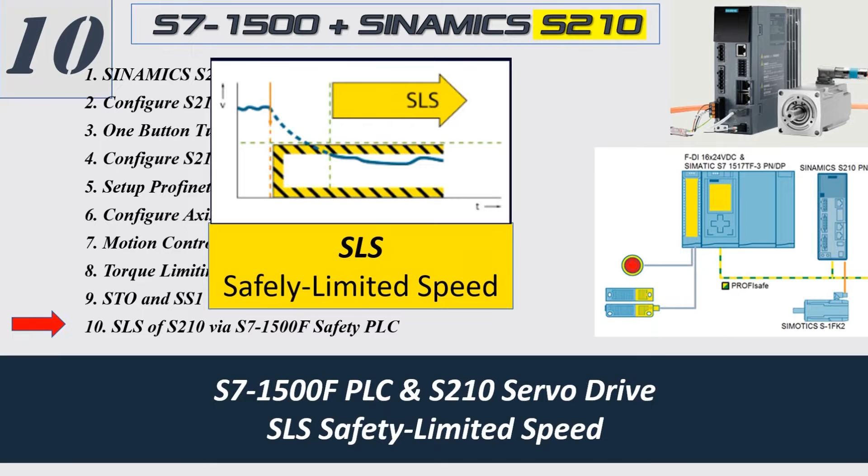In the previous video, I implemented the STO, safe torque off, and the safe stop 1, SS1, safety functions. In this video, I will demonstrate another common function. This is a little bit more advanced function named SLS, safely limited speed. Using SLS, once the drive speed is out of the valid window, the drive will go to SS1 or STO mode.

Safely limited speed is one of the commonly used safety functions in converting applications. For example, when the gates are all closed, the safety is all okay and the system can run normally. In other applications, when the door is opened, the safety needs to totally kill the drive, maybe with STO or SS1. However, in converting applications, when the gate is opened, we still want the drive to be able to run slowly, for example to do a jog move. This is used for threading the web, manually setting up the web in the machine.

So when the door is opened, we still allow the drive to be powered up and run at a slow speed. The safety function needs to keep monitoring this speed. As long as the speed is within this safe range, the safety shows okay. Once the drive speed goes above this range, the safety should immediately kill the drive. This is a very widely used feature.

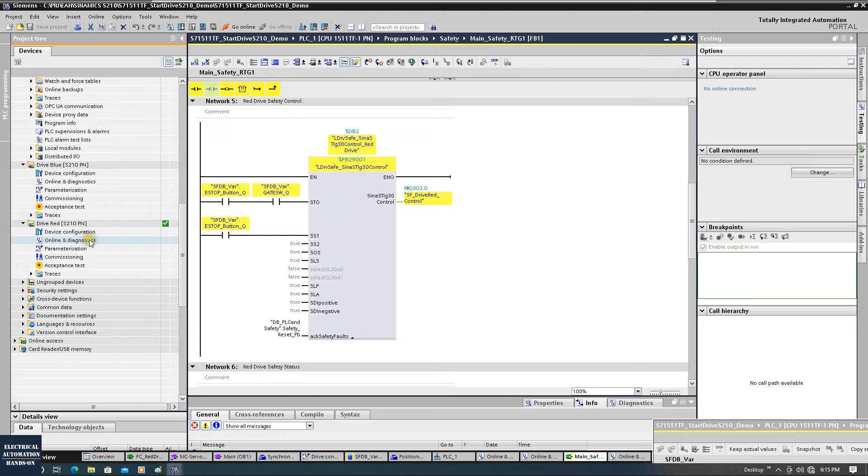In the previous video, we implemented this function block and connected the commands to STO and SS1. To enable the SLS feature, let's first go to the red drive. Same as before, I will configure the red drive with Startdrive, and I will use the web server to configure the blue drive, to show the difference between them. To implement the safety, we go to the red drive, go to parameterization, and go online.

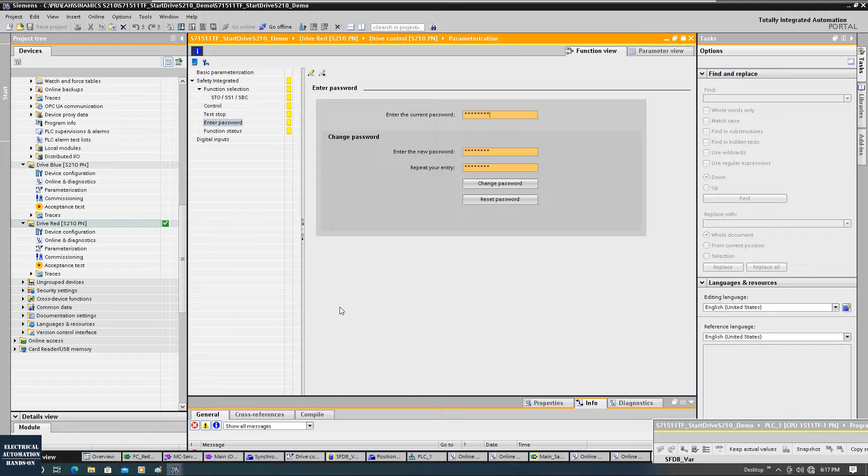In the previous video, I used the basic functions. Now let's start the editor. Enter the current password. Then go to the configuration and click editing. Now we can switch from basic functions to extended functions. Other than STO, SS1 and SBC, all other safety features need extended functions. That also means you need a license in your drive system.

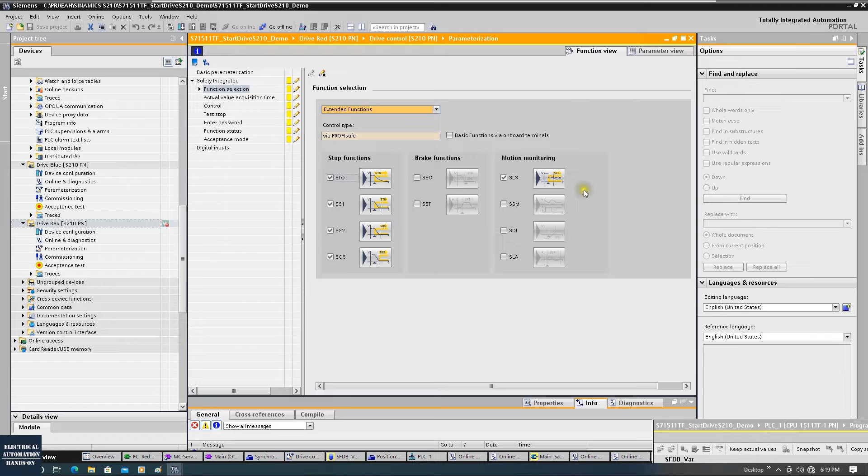On the webpage, we will see there's one license stored in this servo drive, which allows it to do the extended safety features. In this case, I will select the extended functions. As we can see, the SLS function is selected by default under the extended functions. So we can click to configure the SLS. Here we can see the system allows us to prepare four speeds.

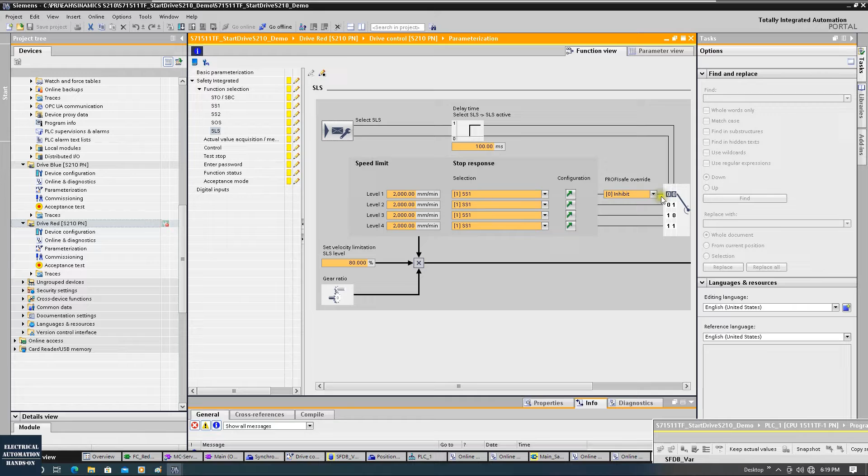From the safety function block, we can use two bools to select these four scenarios, four different thresholds. We can preset the speed thresholds and use two bools to select. The system provides us four options, so you can prepare four different speeds and use this 2-digit selection, which we will see in the program, to select the different speed.

This is the limit monitoring threshold. To set a proper speed here, I would recommend at the beginning you leave it at default or leave a higher window at first. Then you can test your machine to find a proper speed and calculate the RPM value for your motor. Then you can find what the lower threshold is supposed to be and set it in the safety. Otherwise, you are not able to run the motor because the safety always stops the motor.

So now I will select the SS1, leave it here. So 100 milliseconds, this is used to have a little bit of delay here. I will leave this 100 milliseconds here. As we can see, for the SLS, we only need to focus on this speed window, this threshold here. And also keep in mind, we need a license in the drive.

I will show this license while we are configuring the blue. Okay, for the SLS, we're complete, very simple. Okay, and after this setup, don't forget, stop this editing and click this copy RAM to ROM.

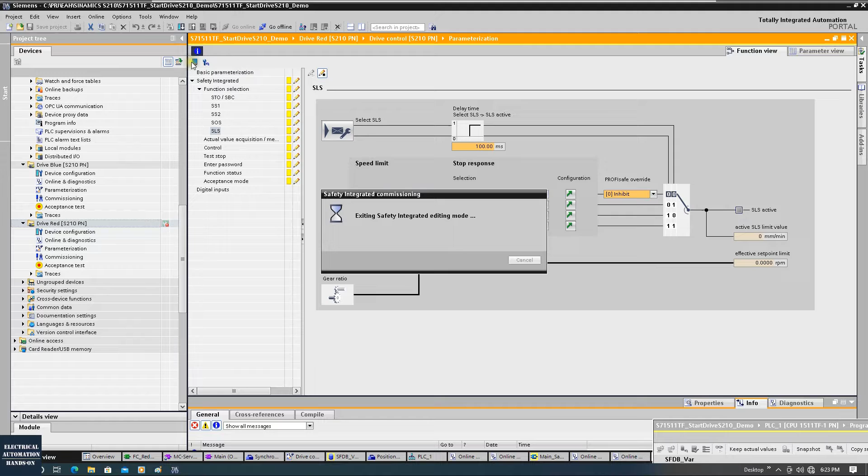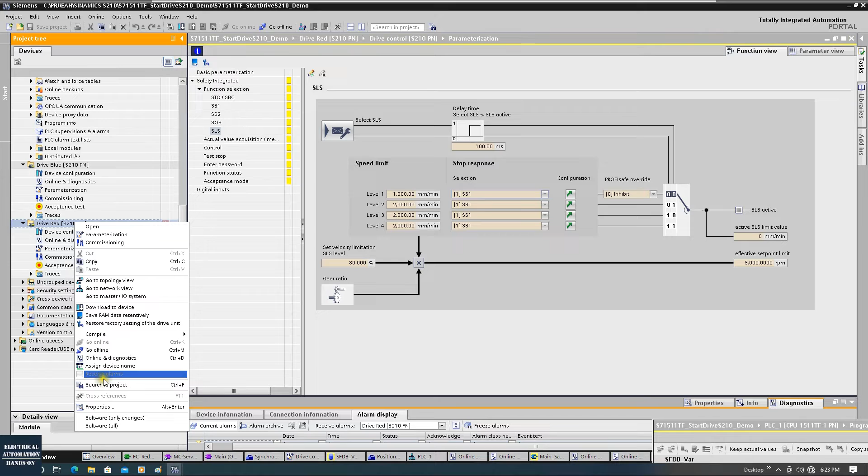Okay, after this, I will do an upload. Okay, do an upload. Okay, let's go offline. But now if I execute this upload, we will see all the configuration we did at online edit. So they will be uploaded. Okay, I will do a refresh, close, and reopen.

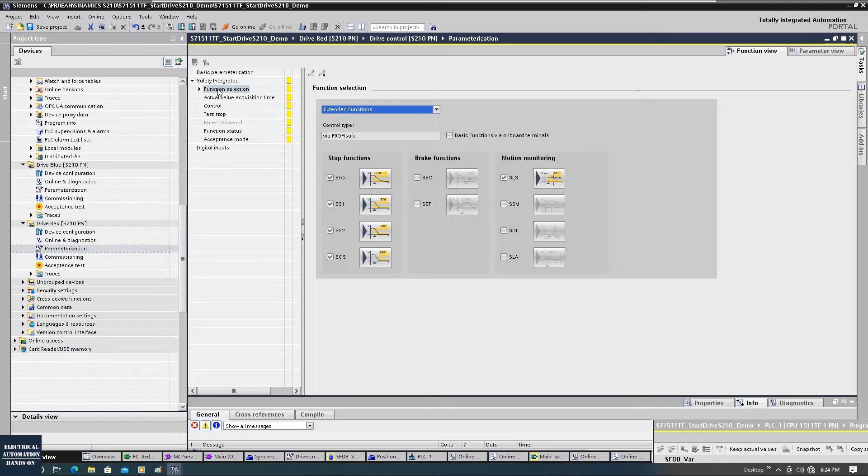Parameterization. Okay, after the upload, we will see the safety function here. So it selected this extended function. And if we go to the SLS, we'll see 1000 set here. Okay, so we did the upload. And then let's go to the blue. The blue, I will use the webpage to configure this blue.

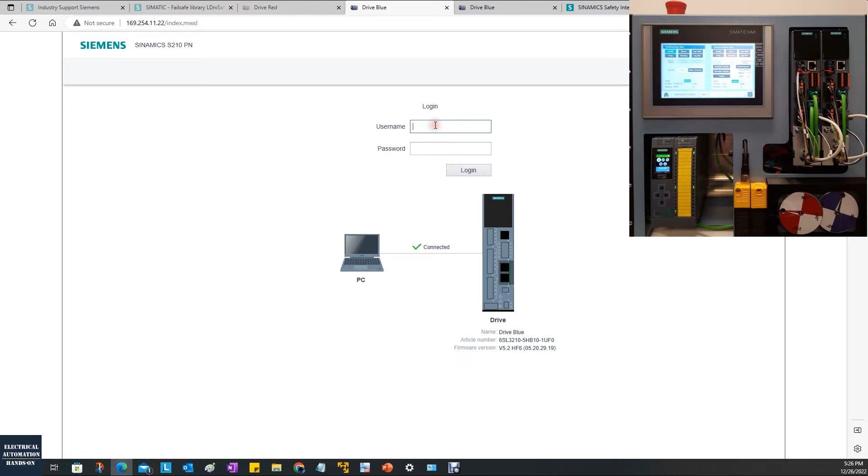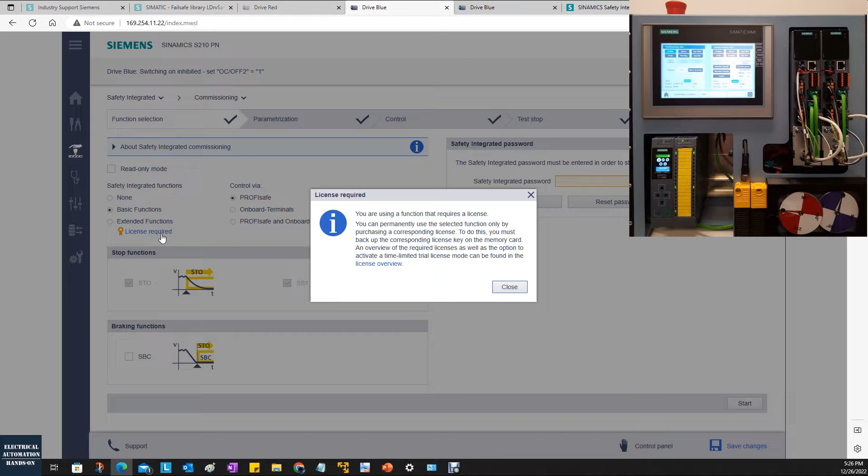Okay, I'm browsing this blue motor, drive blue, and I will log in as administrator. Okay, log in. All right, we log in here, then go to the safety commissioning, safety integrated commissioning. Okay, and we can see here, if we are going to select this extended function, it shows license required. If we click here, it will tell us we are using a function that needs the license.

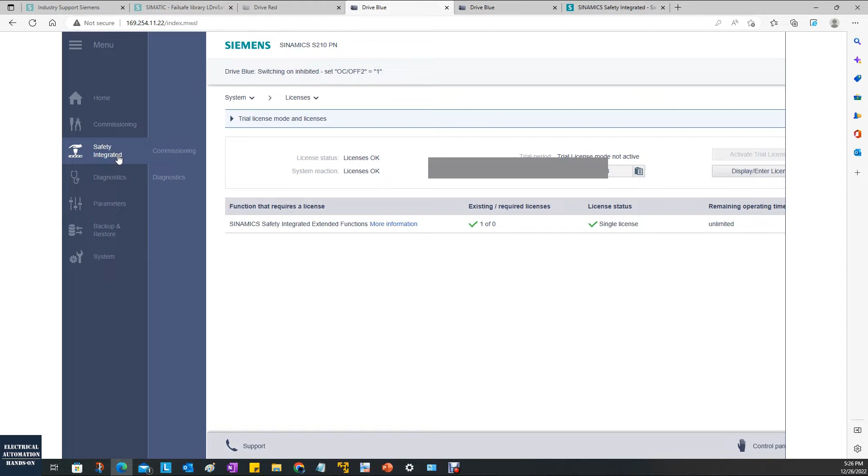And because this demo is integrated with the license, we can see here, go to system license. We can see it's integrated with this extended license. So I'm able to demonstrate this feature. Okay. So now I go to this safety integrated commissioning again. And I can select these extended functions. And I need to tell the system I'm using the rotary axis.

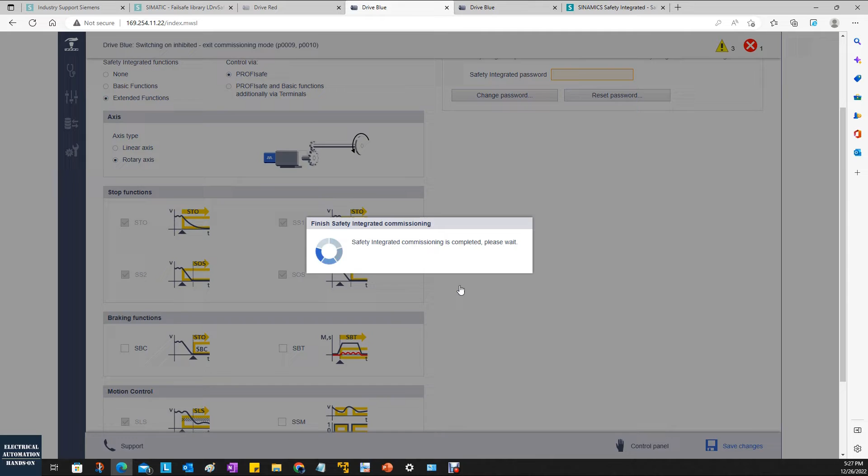Okay. It's asking us for the password. The password is 1, 2, 3, 4, 5, 6, 7, 8. Click OK. We select this rotary, and then let's go to the SLS function. So SLS, and let's click this start. Password again. Okay, shift to the parameterization, and we can configure the SLS. So go to the SLS feature.

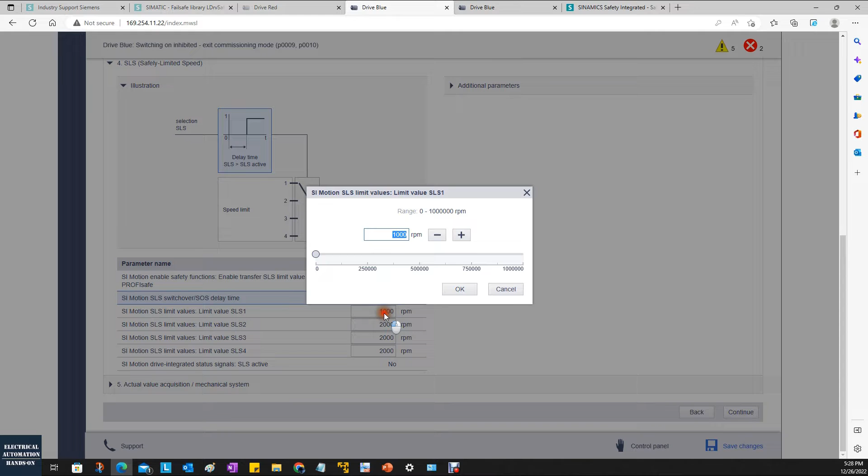So similar idea, we have 4 options here, and this default delay time is 100 milliseconds. Same thing for this drive, I will set 1000 here. 1000, click OK. Okay, and the delay time, this is the 100. So the only thing we need to focus on is this, the speed limit. Okay, this is the monitor, the safety.

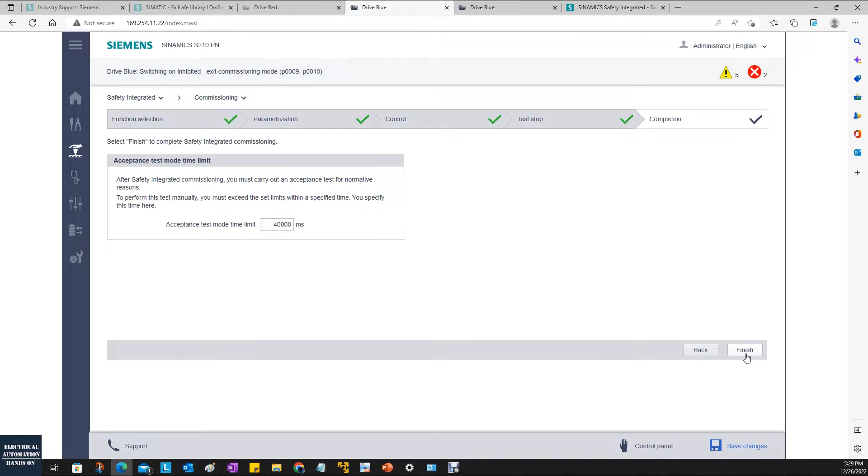And the same thing, we confirm this Telegram 30. Okay, and also if the PROFIsafe fails, what's the response, SS1. Okay, then continue. Same thing. And finish. Save all the parameters. This is a similar idea as copy RAM to ROM. Okay, we finished the configuration.

So it's showing an error here because on the CPU side, we haven't configured anything. It's asking for the acceptance test and this checksum test. From the TIA Portal side, we need to upload those parameters. Okay, so let's go back to the TIA Portal. Go back to the TIA Portal, go to the drive, offline, and we can do the upload from the device. Upload all the parameters we just did from the web page.

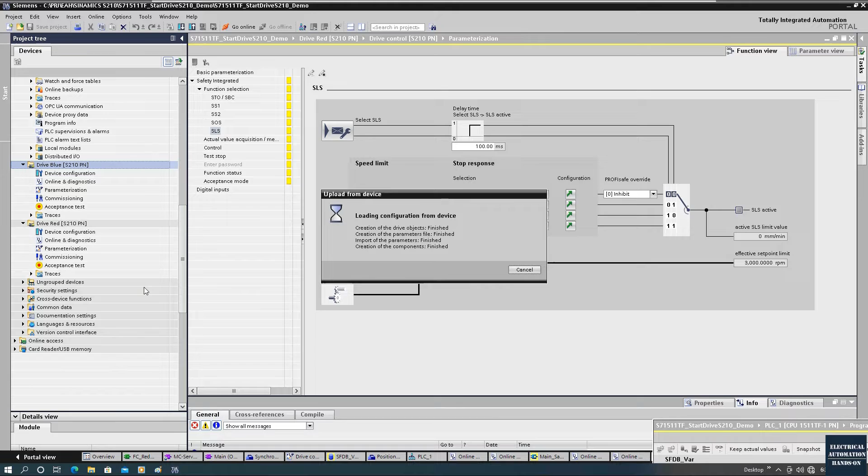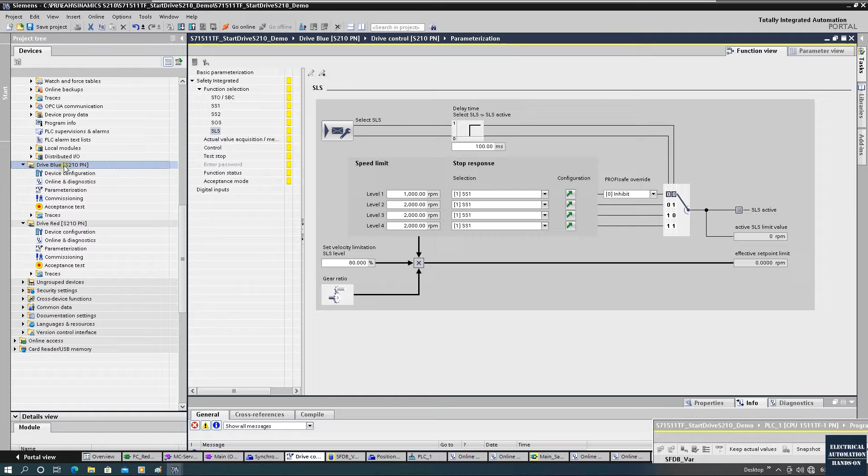And after the upload, let's go to the parameterization and double check if the parameters got uploaded. Okay, STO, SS1, and we can see the 1000 set here. Okay. All right, so it got uploaded. Now go to the CPU side and go to the program.

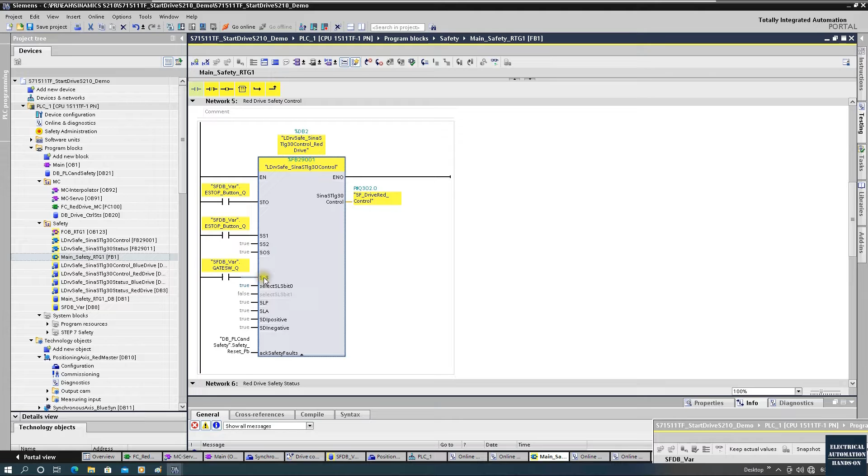Okay, in the CPU safety program, this time I will use the gate to turn this SLS control on and off. Okay, so I can connect this logic here and move this gate signal to here. Okay, so that means if the gate is closed, if this SLS is on here, that means the safety is okay, then everything shows okay. It doesn't matter if your speed is high or low.

Okay, but when the gate opens, when the signal goes off, then internally the SLS function will monitor the speed. If your speed is slow, the drive can still move.

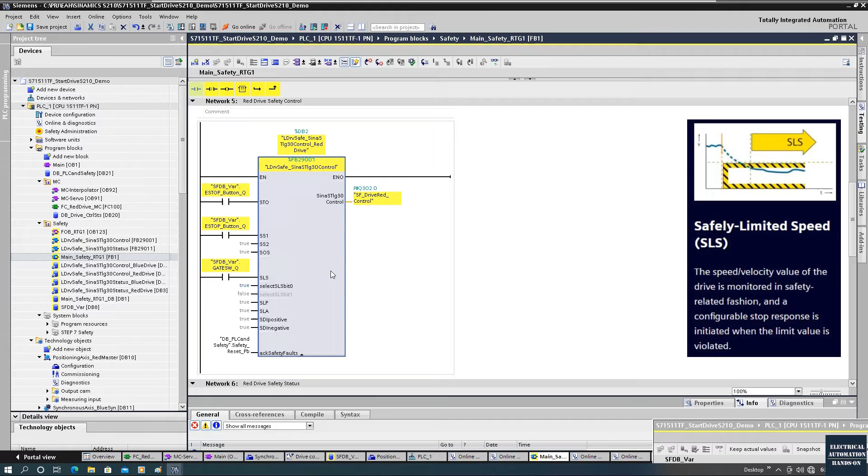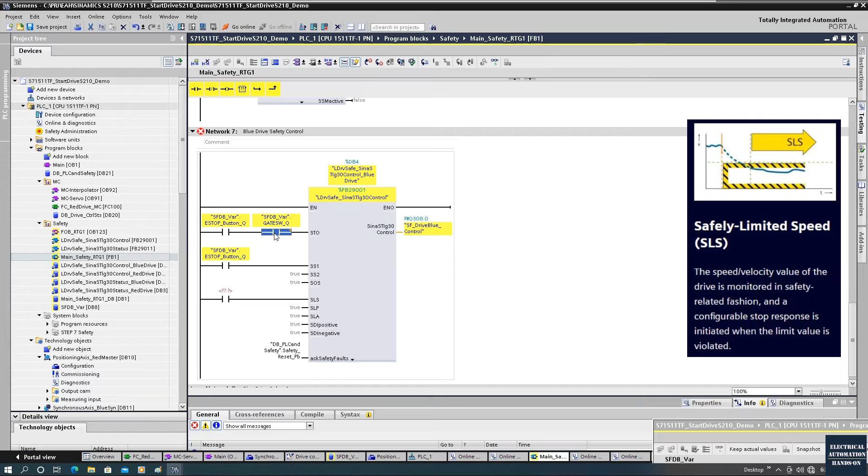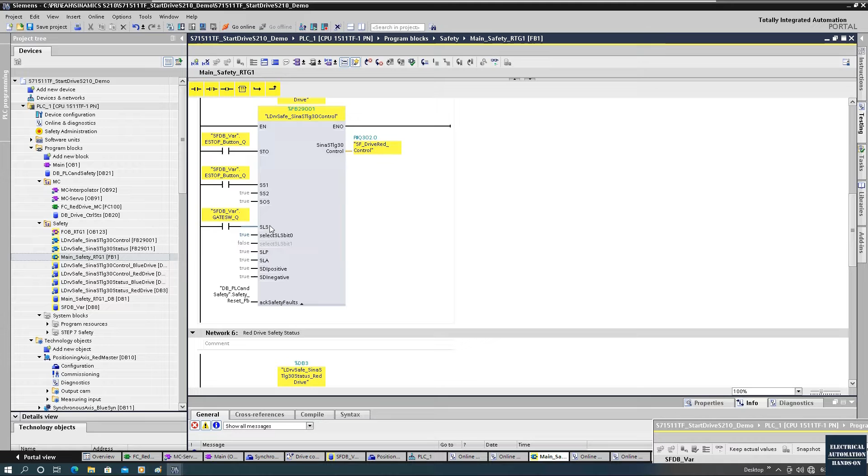Okay, same thing for the blue drive. I will do the same thing. The SLS here, I will move this gate to here, and delete this. All right, EStop is still working. It can kill the STO and the SS1, but the gate will control this SLS, keep monitoring or without any monitoring. Now I can download the CPU.

Okay, let's download. So as we can see, the only thing we need to change from the PLC side is the command here, because we are using this structure, the control and the status from the library I introduced in the previous video. Let's stop and reinitialize, and start up the controller.

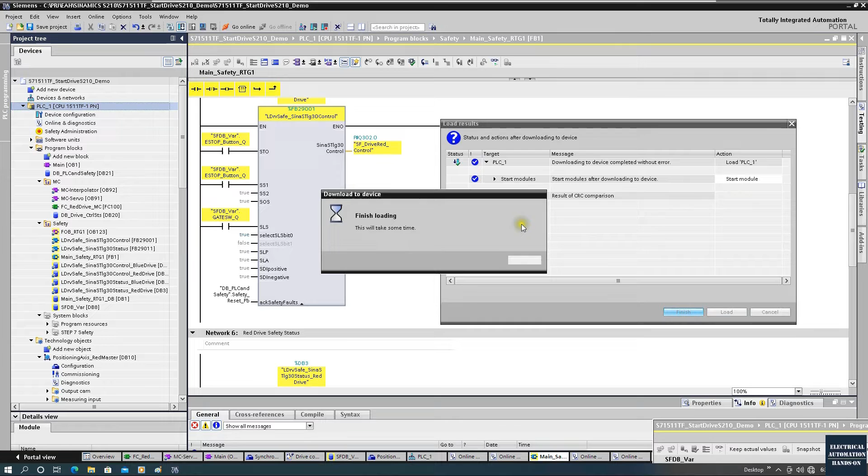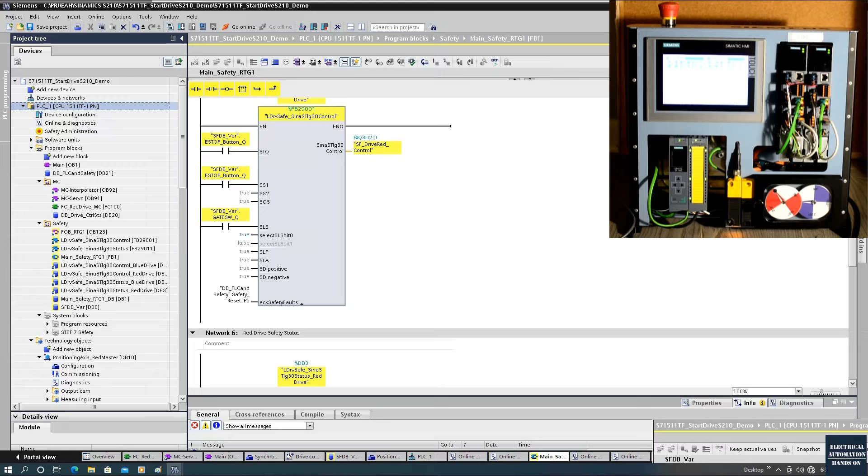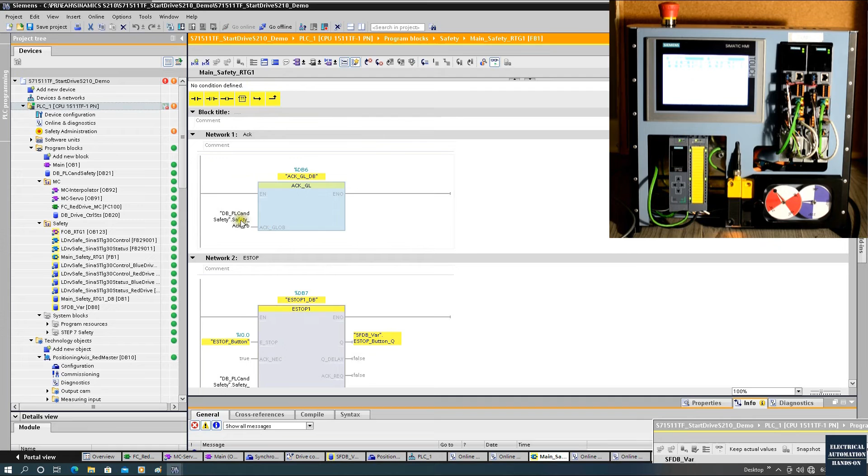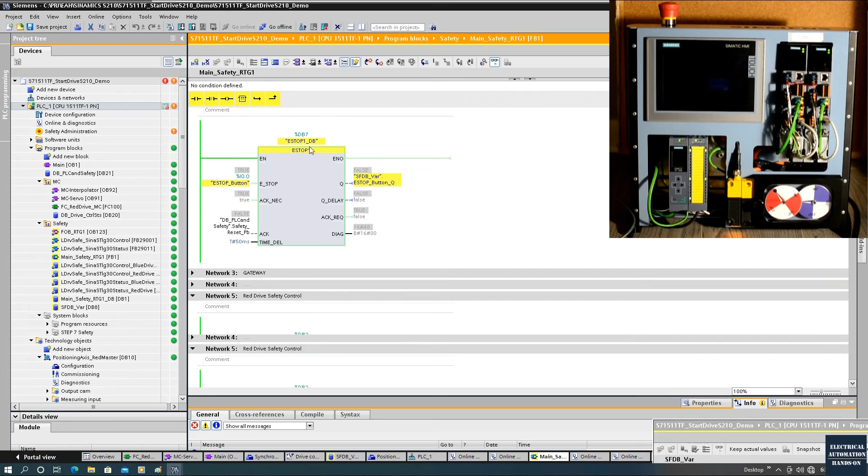After we start up, we will see the drive and the controller are all green. That means everything is okay. And the EStop and the gate are all at on status. So now we can monitor this safety program. First, let's acknowledge the reintegration. So we acknowledge this global acknowledge and check this EStop. EStop is still off. Let's acknowledge the EStop. All right, EStop okay, gate is closed.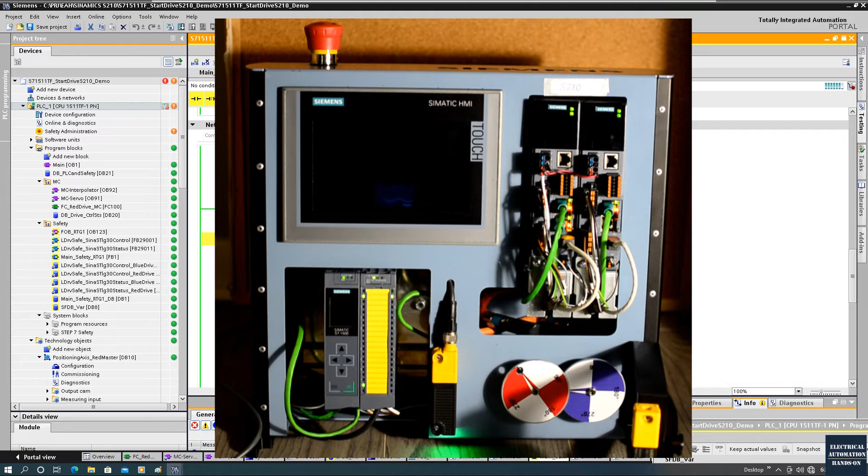So now if I open the gate, that means we are maintaining the machine, or we try to manually thread the web inside. Now the gate is open, so we can see this gate switch output is off, and the command for this SLS is off also. Which speed is this SLS monitoring the motor at? This comes from this selection. Bit 0 is 1, so the actual speed comes from this 0, 1 speed, the second line here. So we need to set a proper threshold for this SLS function.

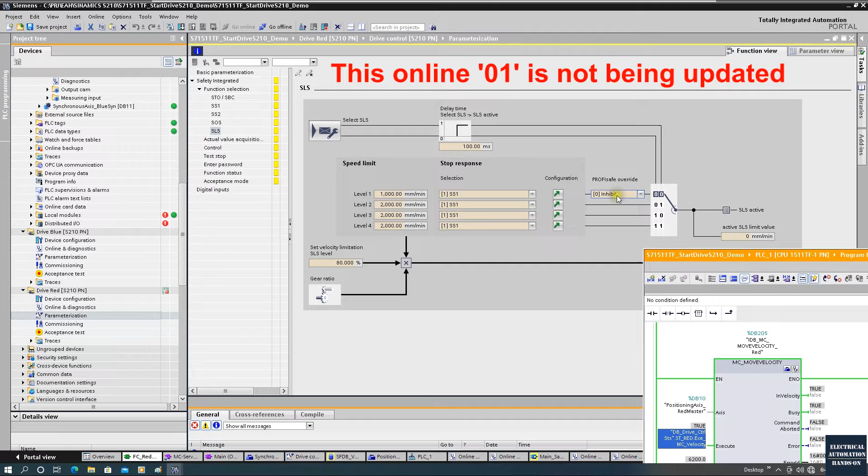I can change the speed to 1000 here. Click this button, type in the password, and then go to the SLS. Change the speed, click edit, change to 1 also. So it's selecting this speed, 1000. And then click stop. Finish the editing, and then copy RAM to ROM.

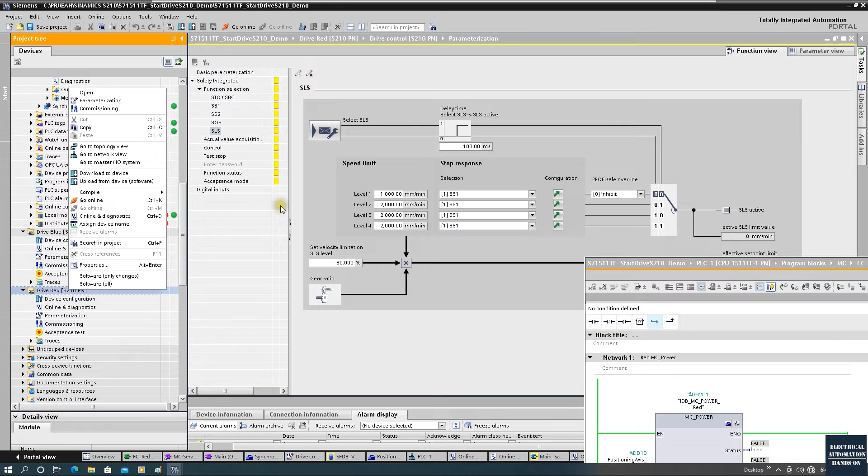After we change the parameter, we'd better cycle power the drive. And also we can do the upload. Go offline and upload the parameter. We will see offline is still 2000. Upload the parameter. I will first close the gate, and second, power the drive.

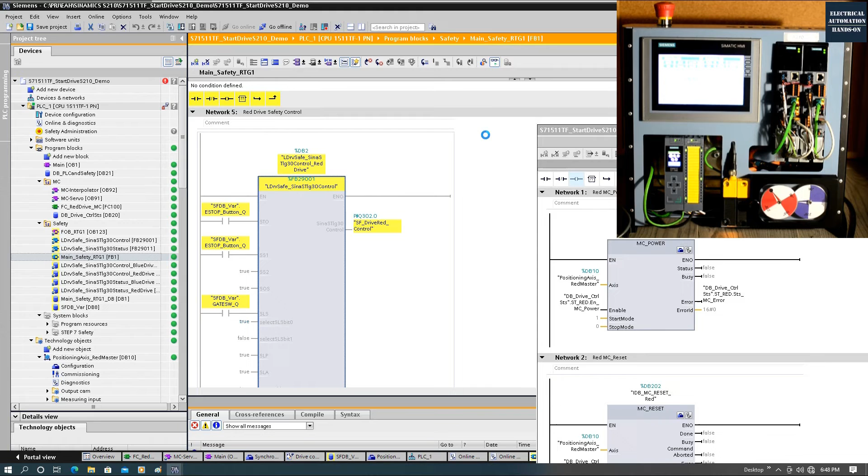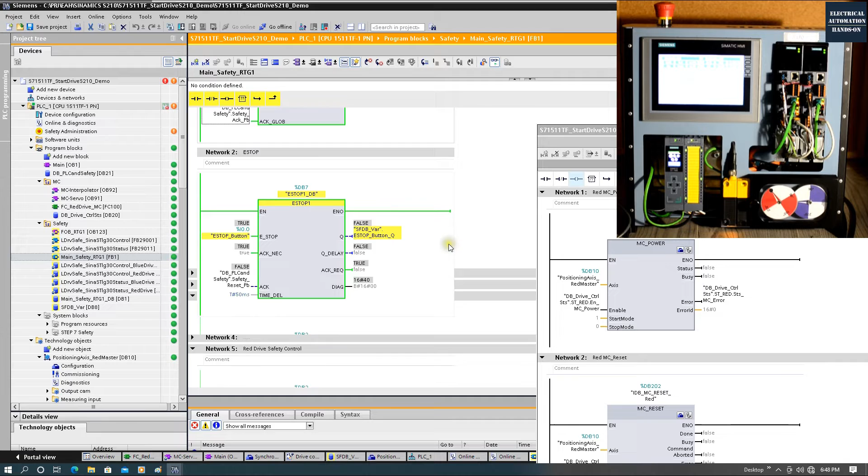After the system automatically boots up, we will see everything shows green. Same thing, we will acknowledge the reintegration and acknowledge the EStop. Close the gate, everything shows good. Keep in mind bit 0 is true, so it's selecting the second line. Now if the gate is closed, everything should be normal.

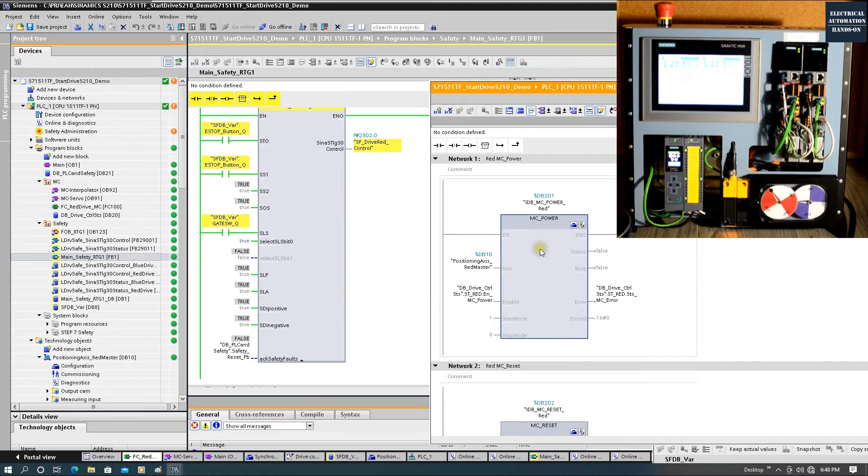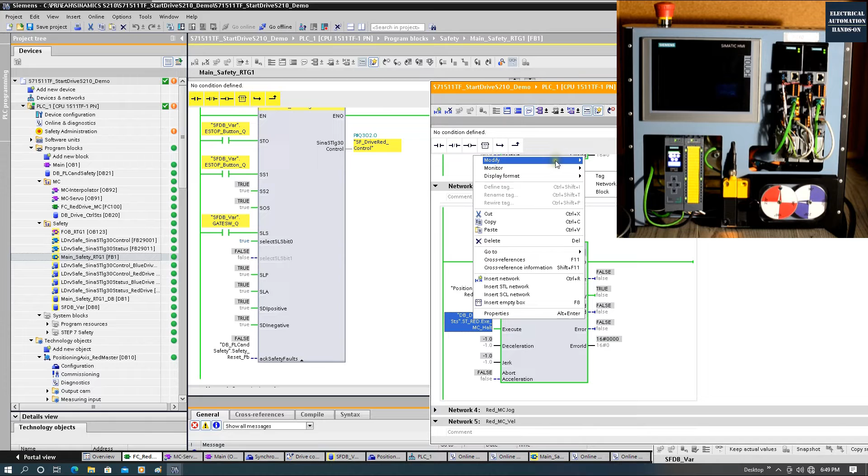I power on, and fire a high speed, for example 7000. I can fire it up. No problem. And I can stop it. Now if I open the gate, we will see the gate is open, and in the safety output, the SLS is now equal to true. That means it's monitoring the drive.

So if I change the speed to a lower speed, for example 360, this is lower than the threshold we set, the 6000. Maybe this threshold is too high, but we can change it lower. So we set 360 and spin the motor. We will see the motor can spin, or you can slow jog the motor, no problem, even though the SLS shows true, because so far this speed hasn't gone above 6000 yet, based on this 1000 RPM.

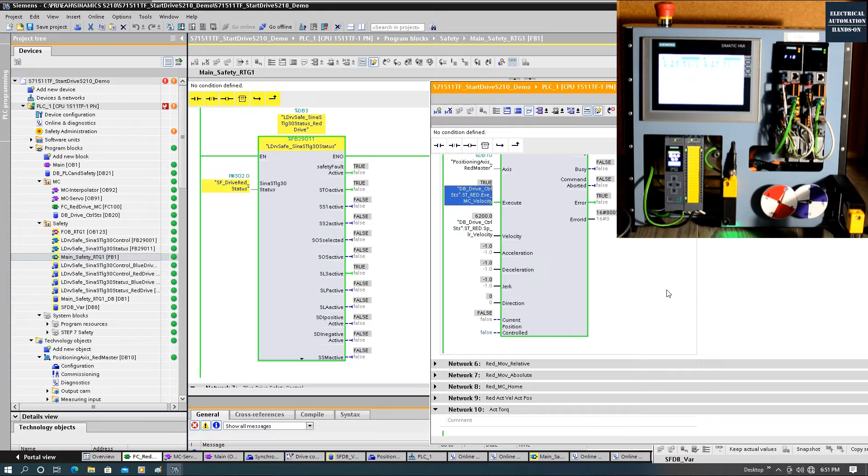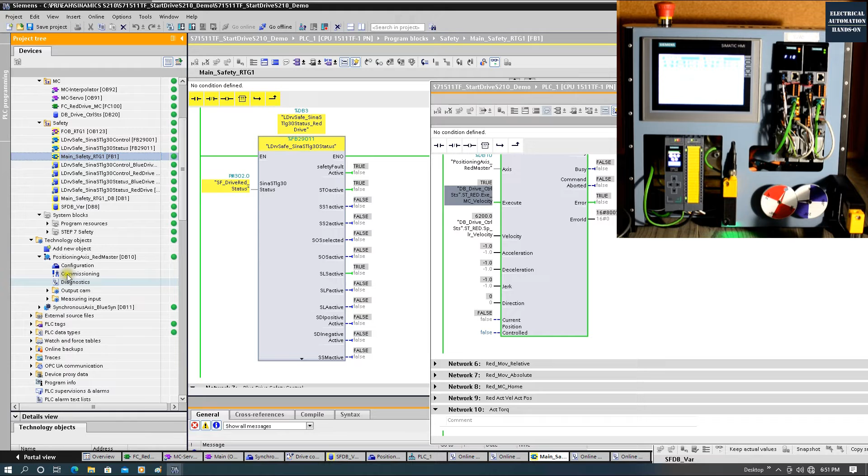Now if I stop the motor, or without any stop, if we change the speed to higher than 6000, say 6200, and fire it up, we will see, boom, immediately the safety stop. The drive got an error because it applied the SS1. Now if we go online to the drive's safety parameterization, we can monitor this SLS here.

So we will see this speed selected here, 0, 1, right? And it's selecting this 1000 here. Okay, this is the behavior of this SLS. So one thing we need to take care of is this.

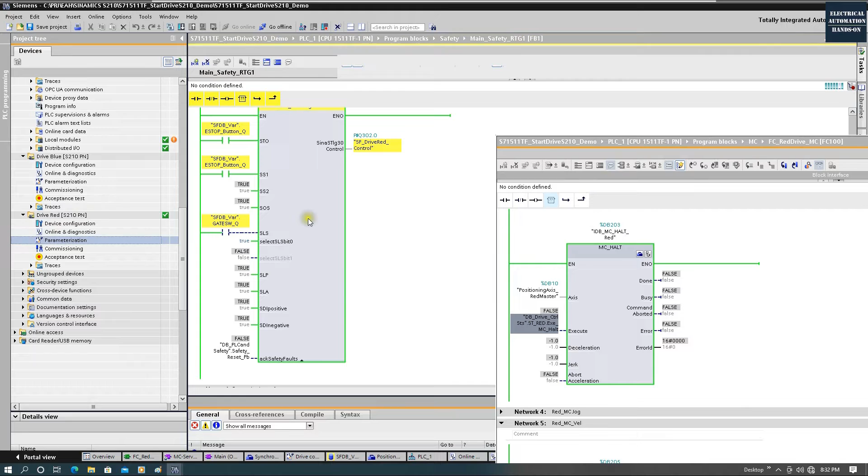Once we go to the parameters, we will see one thing here, the unit. The unit showing here is millimeter. This is a little bit weird, because in this application I set the TO as rotary and our unit is degree. But safety-wise, it's showing millimeter. So what's the reason? If you recall, when I configured the blue drive, there's one setting, rotary and linear. This is the key reason.

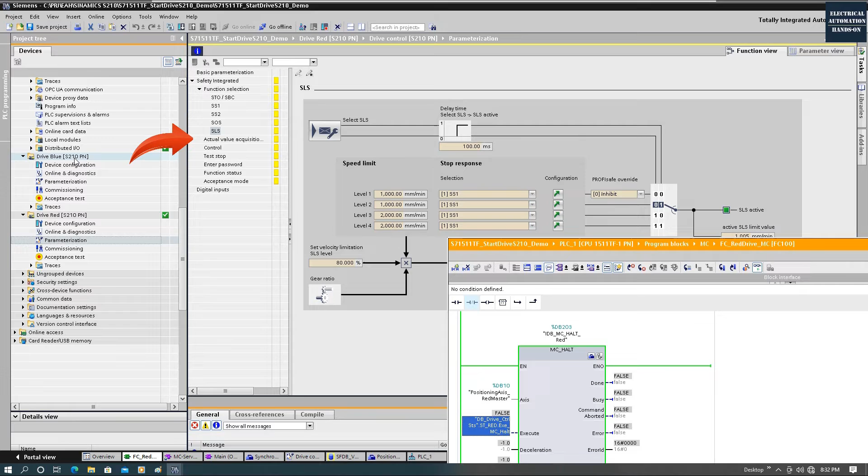And this setting can be configured just below this SLS while we are online, named actual value acquisition. So we can change the motor type from linear to rotary. Or we can go to the web page and do the same thing as the blue drive. In this case, I will go to the web page and set the same thing to make this configuration identical with the blue one. Now I will go to the web page.

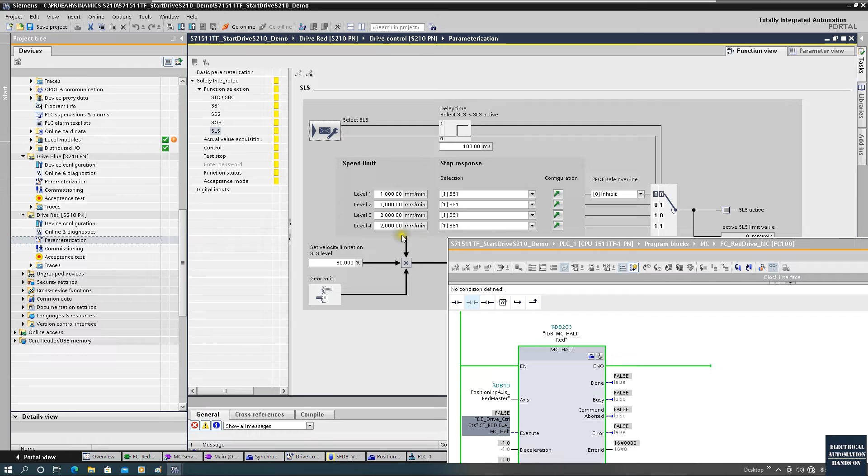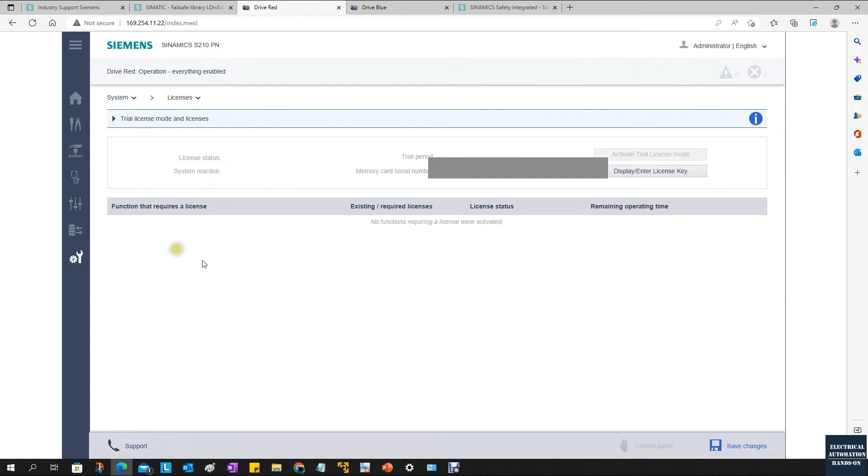Okay, we go to the red drive, browse web page, and type in the administrator password: 1, 2, 3, 4, 5, 6, 7, 8. After we set it here, go to safety and go to commissioning. All those things are from Startdrive, and I selected these extended functions. Also this drive is integrated with the license here. Then we go back to commissioning, and this is the selection I talked about.

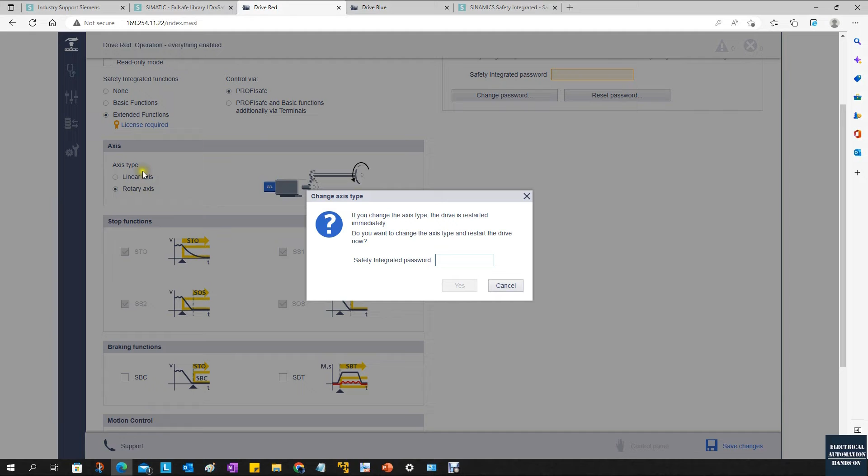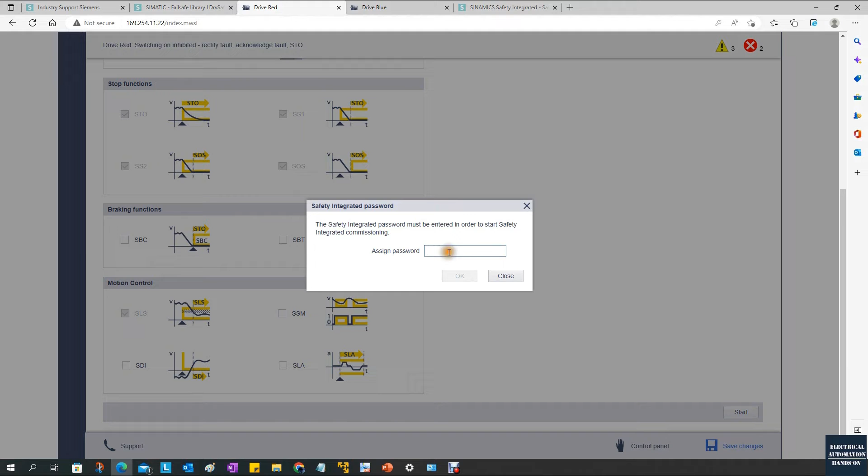So rotary and linear. In this case, I'm using the rotary axis. Once we change to rotary axis, the unit will change to RPM. So you need to be careful about this unit because this is a safety unit. Type in the password. Click OK. Then we are able to change the axis type, change to rotary. Then let's quickly look at this SLS and click start. Type in the password again. We can set the safety and go find the SLS.

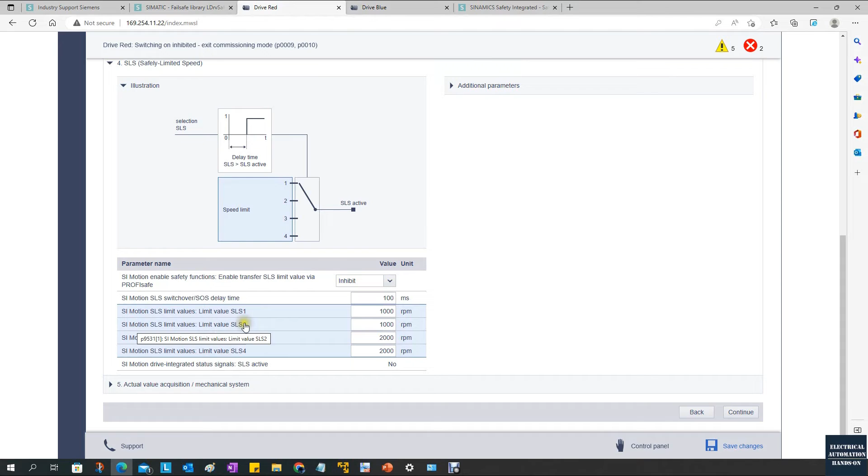Again, the second speed is the main speed we will use because bit 0 is 1. And speed 2 is 1000 RPM. I will change it a little bit to a lower speed. According to the calculation here, RPM means revolutions per minute, right? If I set 100 RPM, that equals 600 degrees per second.

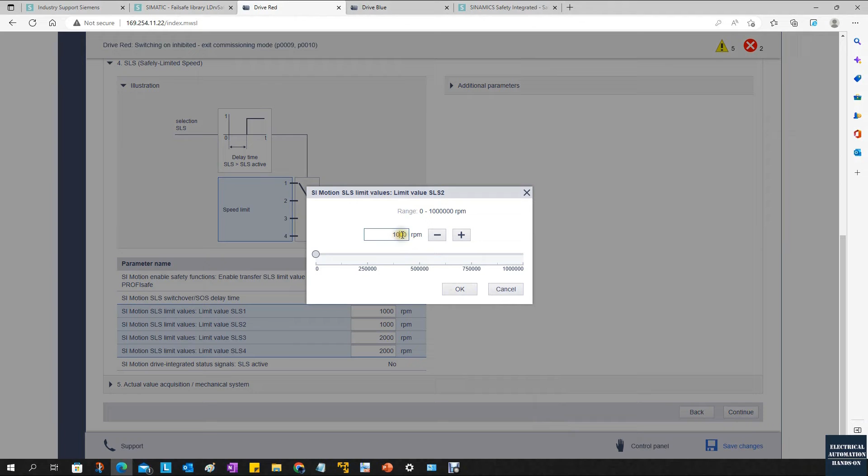From the axis setting, my unit is degree. So if the door is open and the speed is higher than 600, then SLS will stop the drive. If the speed setting is lower than 600 degrees per second, we can still slowly spin the motor. Then I can set 100 RPM. Click OK and continue. Same thing, just continue, finish. Save the parameters, copy RAM to ROM.

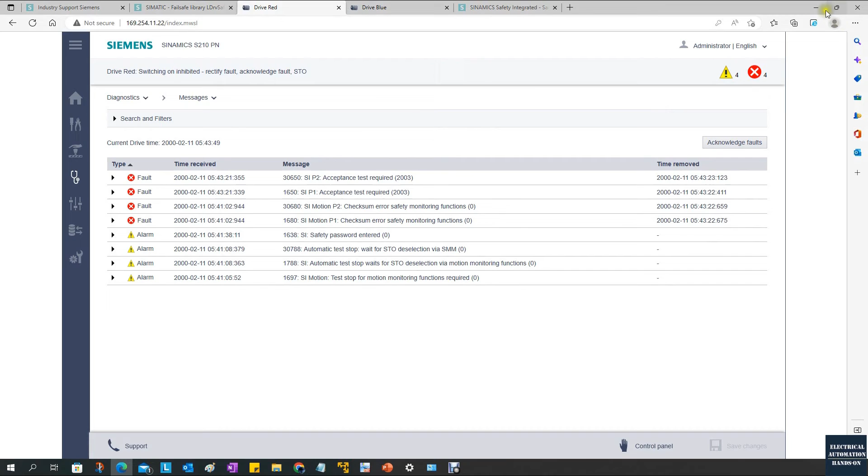Okay, we can see those errors. Now we need to upload the parameters from the live drive to Startdrive. So let's go back to the TIA Portal; currently it is offline. Now I will do the red drive upload from device. Wait shortly. Then we will see those units change, and the 100 setting we just did is updated here. So now if we go online, we will see this value is 100.

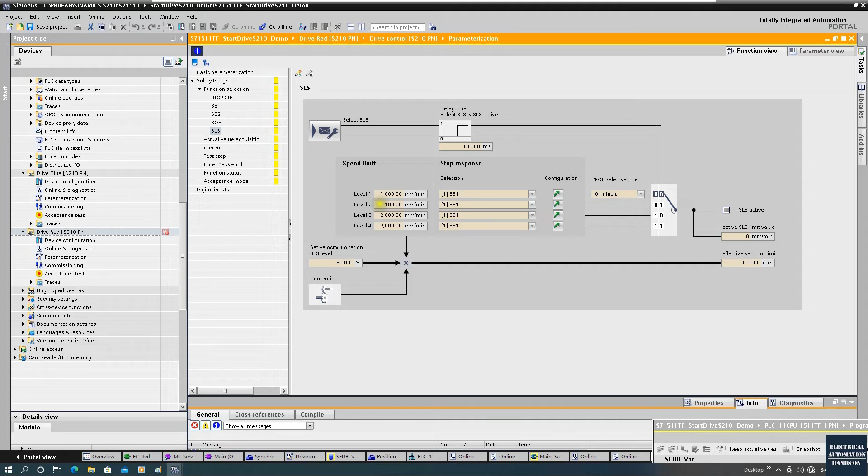However, this millimeter showing here, I think it's a temporary software bug, so we temporarily ignore this. Let's verify this 100 setting. Currently we have a fault on the drive side. So let's see what the fault is. Go online and go to the active alarms. It's showing safety monitoring. Let's first acknowledge this fault. Okay, we can acknowledge them. Now on the drive side there's no fault.

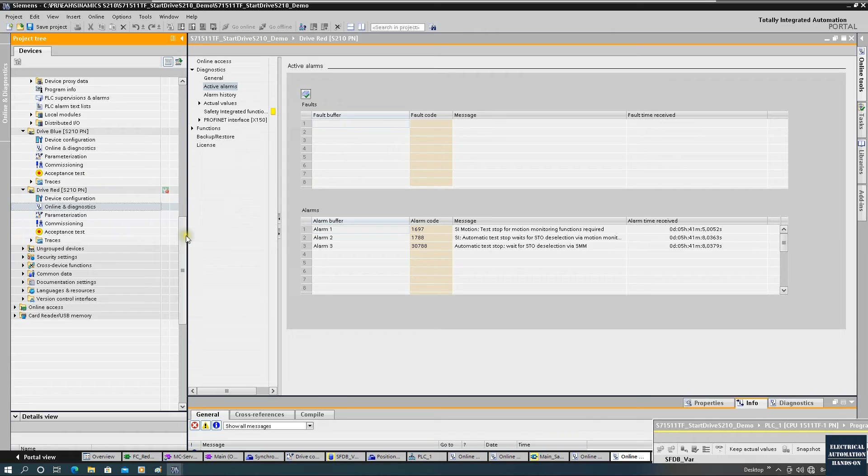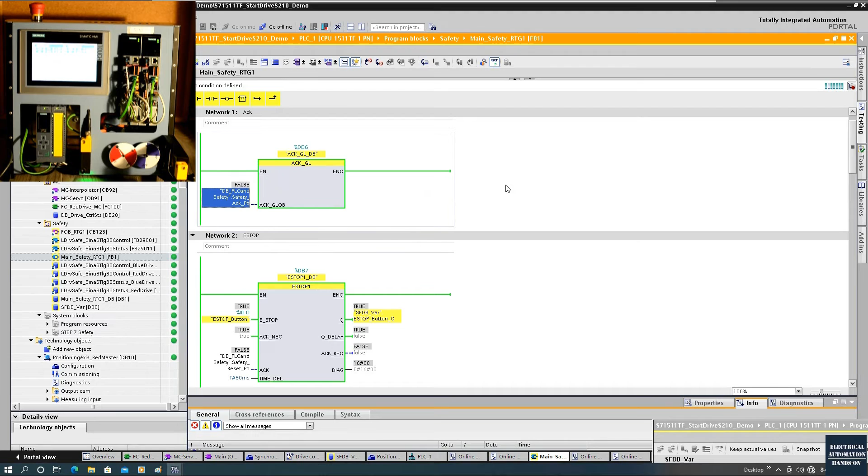Then let's go to safety and do the reintegration. I will first close the gate, and let's do the acknowledge. After the acknowledge, we will see the controller fault is gone. Everything shows green. Now I can acknowledge this E-Stop. E-Stop is true already.

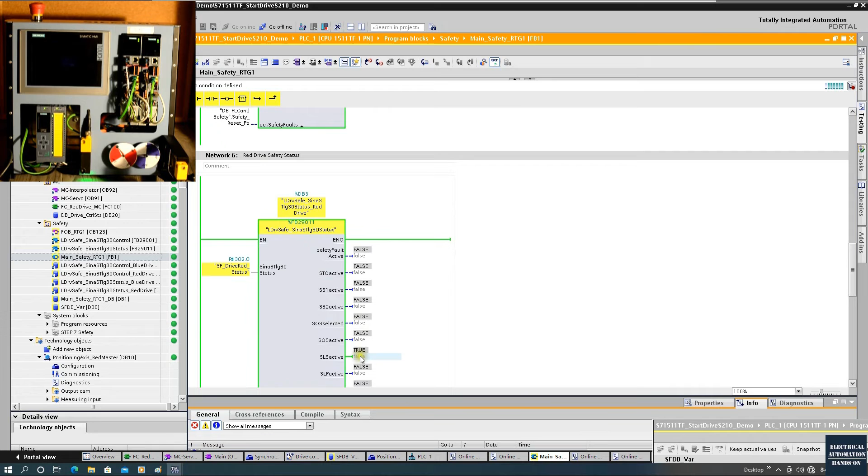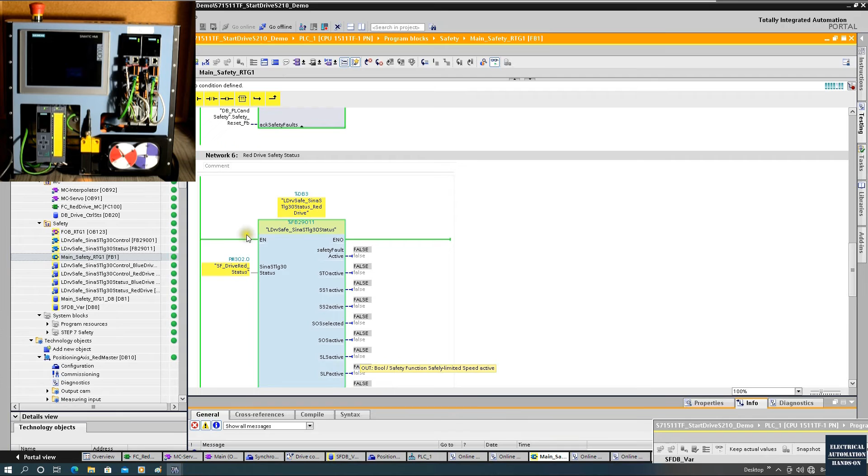Door is opened. Let me first close the gate. This will be on, and this SLS status will be gone. Let's see. Let me close the gate first. Okay, close the gate. System returns to normal, no fault. And now let me open the control program.

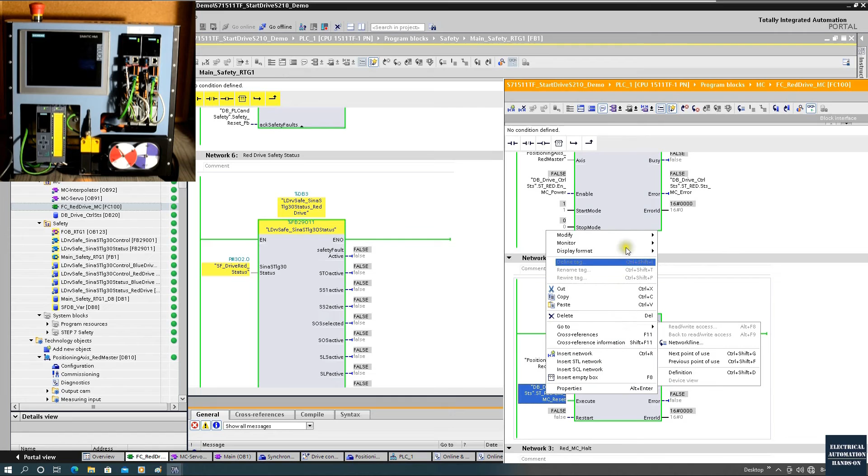And let me power up. Okay, power up has an error just because we haven't reset the axis yet. Okay, let's do the reset. Reset. Okay, power up. Okay, no error. We powered up the axis.

Now let's spin. So we can set a high speed, for example, 2000 speed. Okay, and we can fire it up. Because the door is closed, this is the normal run. So we can fire the speed whatever we want. This is the normal control. Door is closed, and SLS here is on. So this is quite a normal status.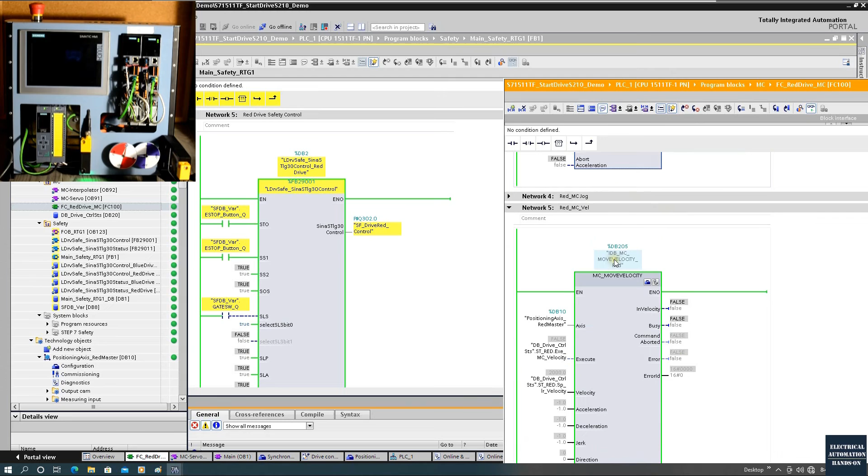Okay, I will stop the motor drive. Okay, let's do the halt. Stop it. Okay, drive stopped. Now I will open the gate. Okay, gate is open. The operator is working in the cell, but they do want to jog the drive. So we can jog the drive, for example, go to the jog.

The setting 360 is lower than the 600 degrees per second. So with this jog speed 360, we can jog move. We can do the backward jog move. Okay, slow speed, no problem. Open the gate and the forward. Okay, no problem, right? Or we can fire the drive velocity move.

Fire 550. Okay, because the threshold we set is 100 RPM, that's equal to 600. Okay, if I fire 550, let's trigger. Okay, the drive can still move. No problem. However, if now for some reason the drive is controlled to run faster than 600, let's fire 700.

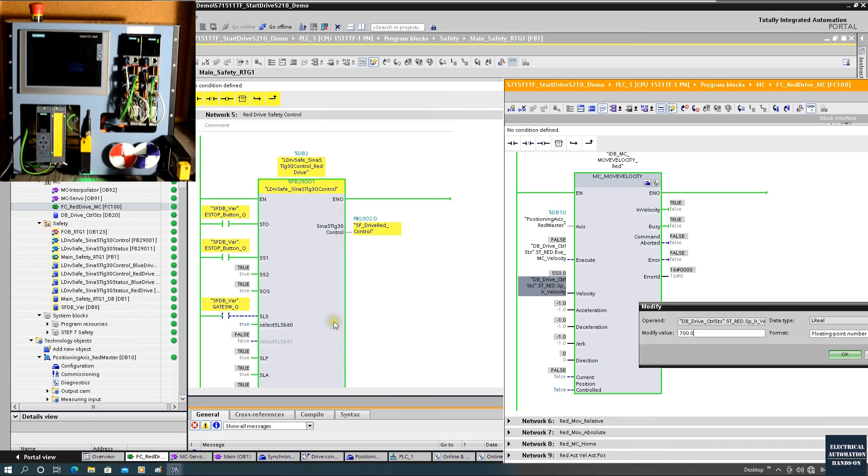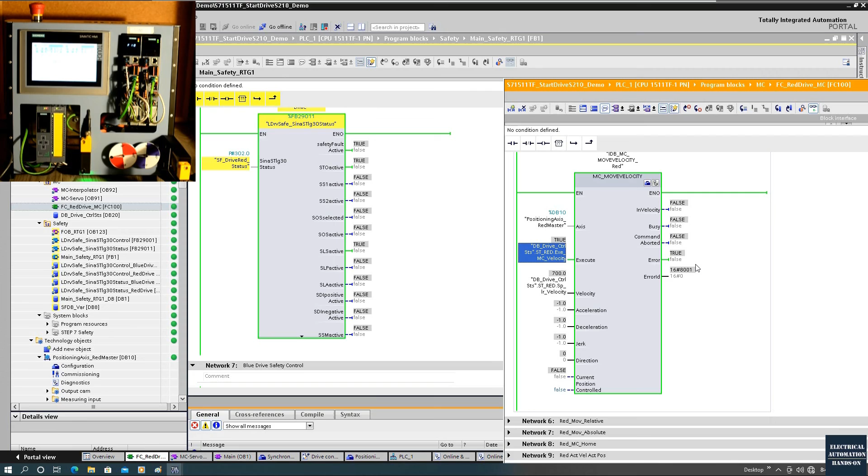Okay, now the door is opened, right? And okay, I set 700, but I haven't triggered yet. Then if we scroll down, we can see now the SLS is monitoring this speed. So if I fire a higher speed, the drive will immediately stop. Fire, boom, stopped. We see the drive stopped. Okay. If I shut down this light, we'll see the indicator error, both from the drive and the controller.

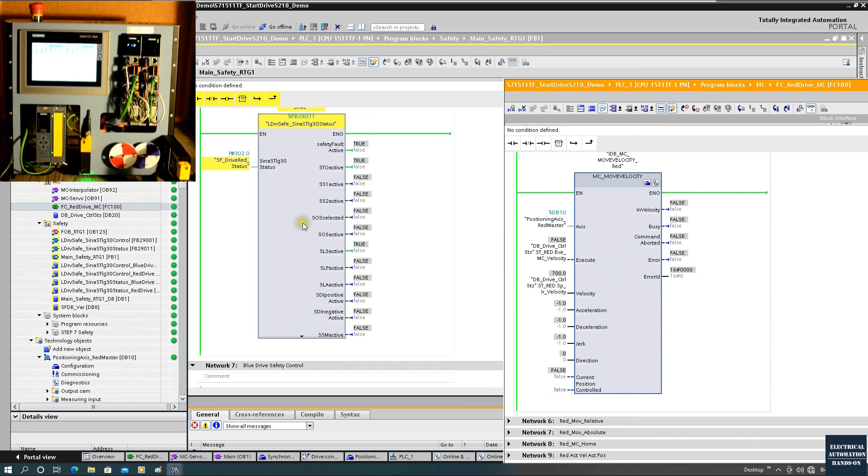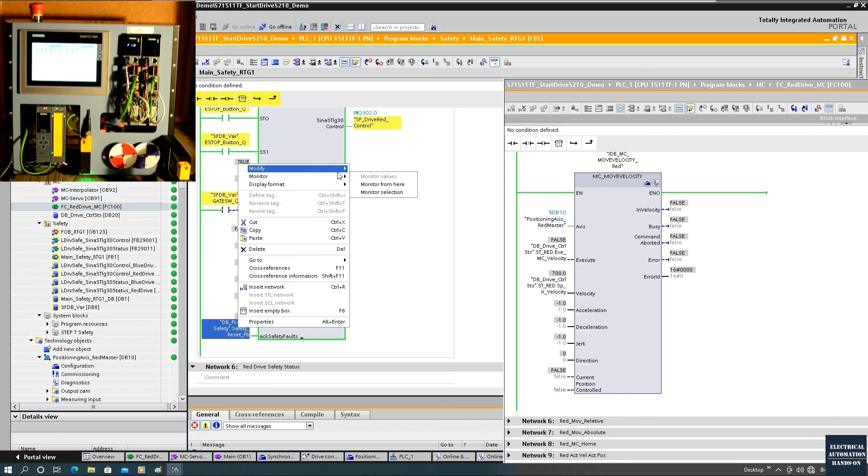Okay, like that. Okay, so now to reset this, firstly we need to acknowledge this fault. Acknowledge. Okay, acknowledge from the safety. Okay, and then we need to reset the axis fault. After all, this safety is a significant fault, right? So we can reset. Then we will see no error anymore. The drive is powered up.

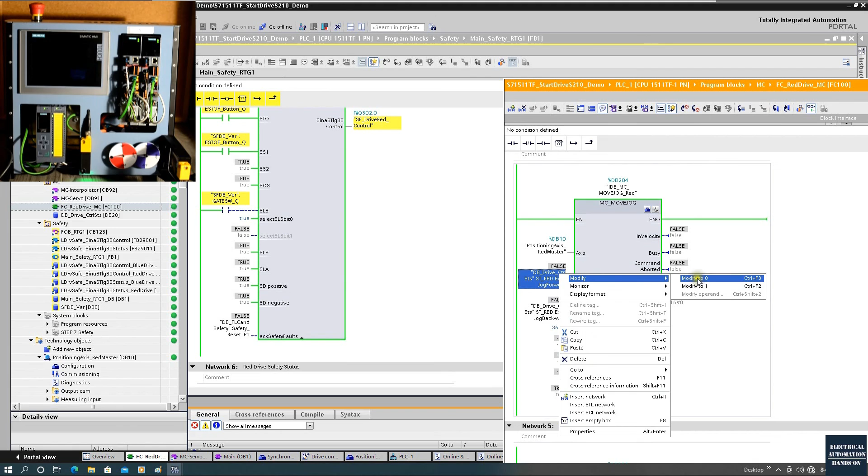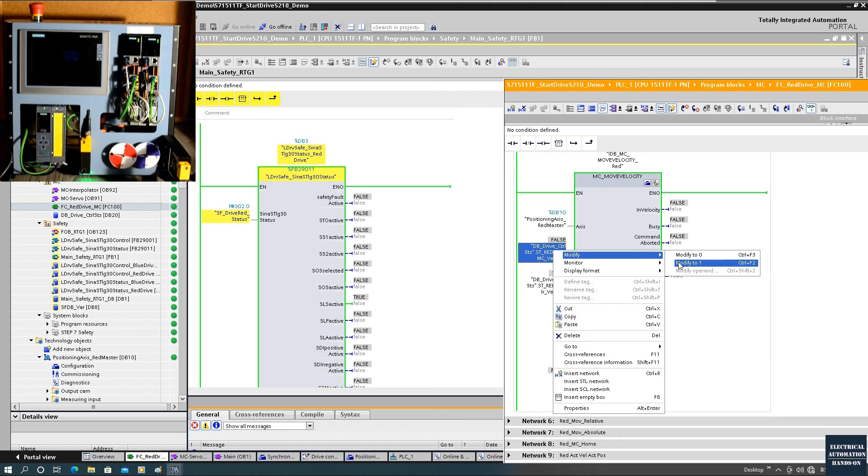If we jog with a slow speed, it can still keep going. Okay. The command 360, if I jog with a slow speed. Okay, it can spin. Again, if we leave the door open and I fire this high speed again, the drive will stop again. So this time, let's watch this output SLS here. And then we can fire this. Okay, 1, 2, 3, fire. Okay, stop.

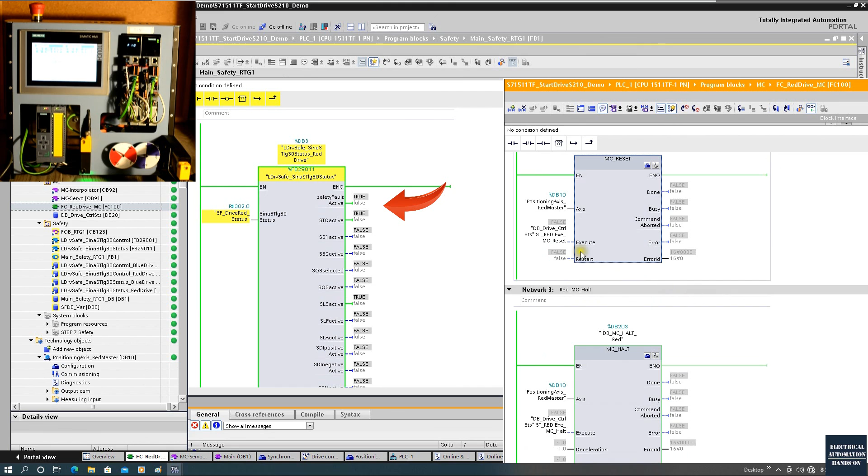EStop. And the error shows A001. And the power error, we can see it shows A001. Okay, axis has an error. Okay, and to reset it without confirming this, if we just reset the axis only, the drive cannot be reset. Okay, still have an error.

That's because, safety-wise, from this control area, we need to acknowledge this safety fault first. Acknowledge. Okay, then the axis reset. Let's do the axis reset. Okay, so the drive can be powered up again. So the axis fault disappeared. Okay, this is the SLS function.

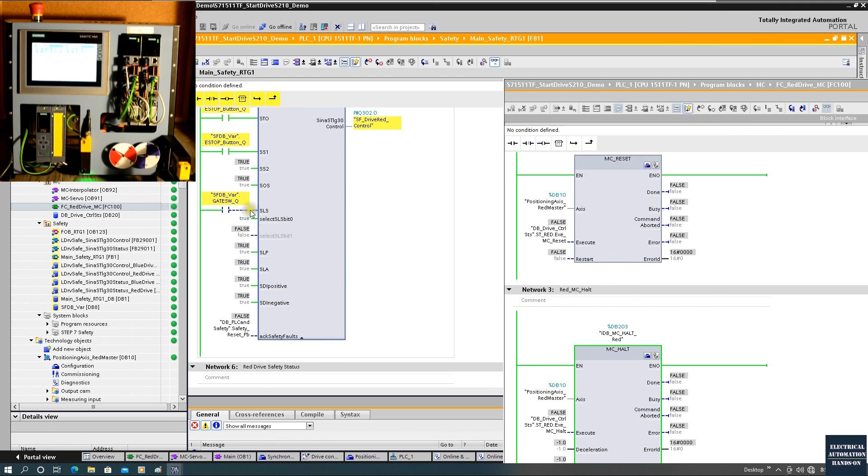Usually the SLS function will be controlled by the gate status. You probably have a couple of gates. So once the gate opens, the SLS command will go off. Then the output SLS active will be true. True means the safety is monitoring the speed from the drive. If the speed is lower than the threshold, everything can still run. If the speed is higher than the threshold, it immediately stops.

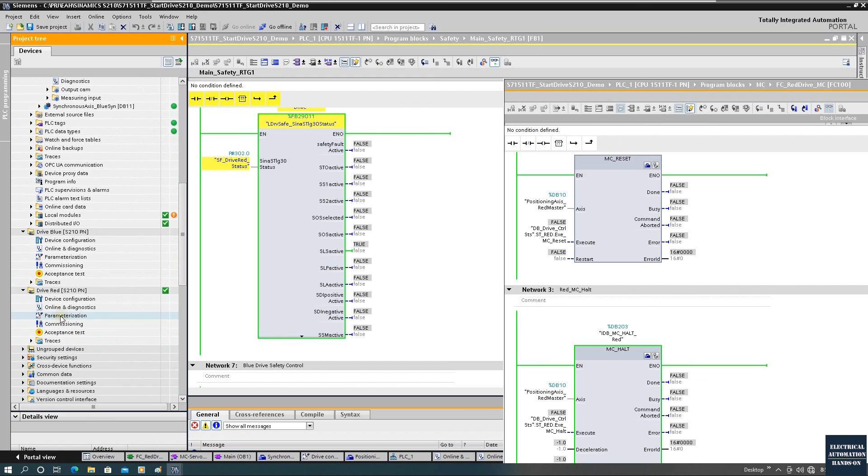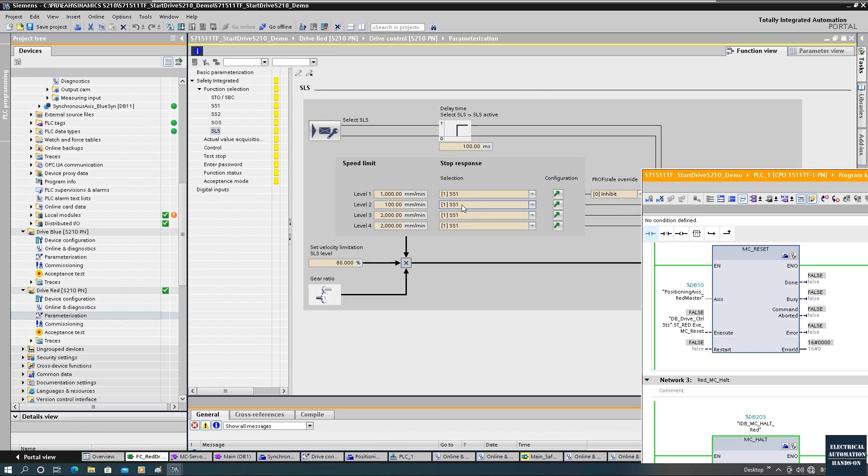How to stop the drive, if you recall, we configured. So if we go to the parameterization, once above the speed, the safety will do SS1, the safety stop, immediately. Okay, so this is the SLS function.